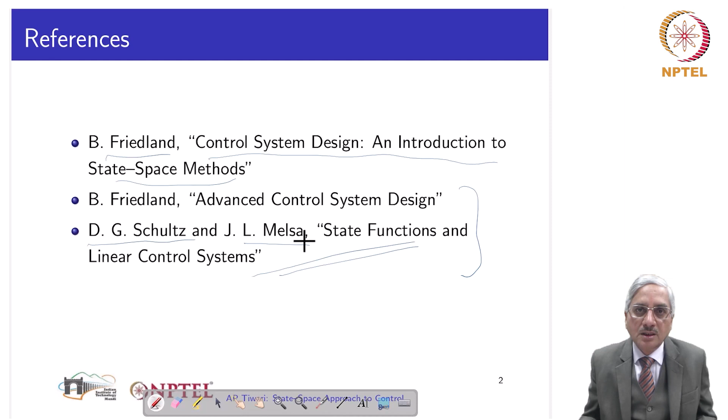I show first the references. Whatever I am going to present today, and in the next lecture, this comes essentially from three references. One is this book by Friedland. I have been following quite very much from this book; many chapters have come from this. I am very fond of this book, very nicely written. Then the remaining two, for continuous time Kalman filter derivations and one example, I have taken from this book by D.G. Schultz and J.L. Melsa. It's also a very nice book in control systems, which I find very entertaining to read, very nicely explained things. Let us proceed ahead.

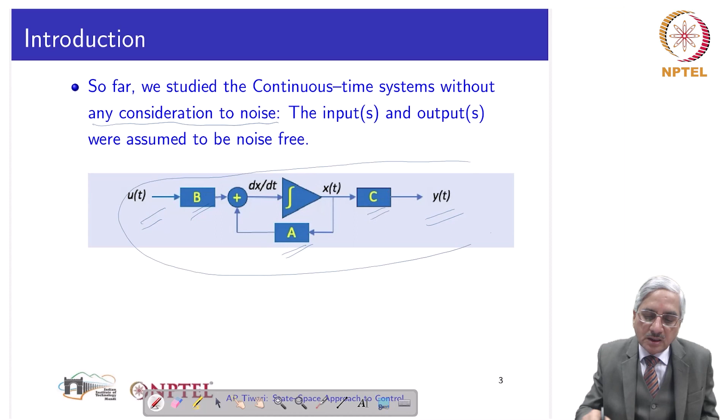As I said in the beginning, we studied continuous time systems so far without any consideration to noise. The inputs coming to the system and the outputs coming out of the system were both assumed to be noise free. No consideration was given, and even though the matrices A, B, C in the state space model utilize this form, nowhere do we see any noise.

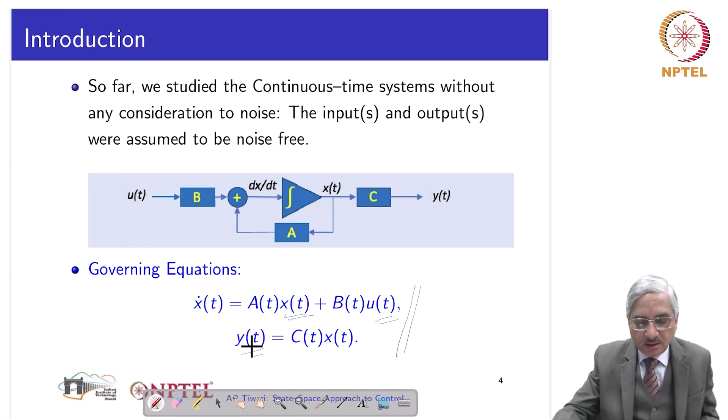And with that, these were the equations we used. So everything is quite deterministic in nature. This system state, system input and system output have been studied in a pure noise-free environment.

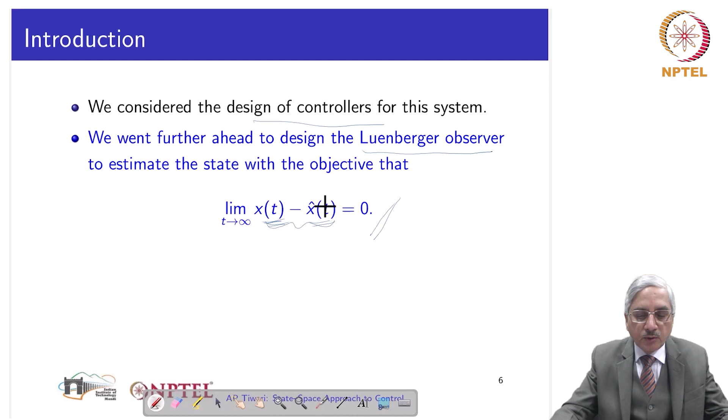We designed controllers, and then in the design of a state feedback controller, we realized that to implement it we require states, and not all the states are accessible or measured, for reasons of economy, installation, etc. So a respite came that the Luenberger observer is capable of estimating the states, with the objective that when time t tends to infinity, the deviation of the estimated state from the actual state, or this error, will be small. With this objective, we learned the Luenberger observer.

And we went on. We studied the separation principle, which established that when we use the estimated states from the Luenberger observer in place of the actual system states, we get the stability and performance as we would have got with actual states, except for some initial time during which the states of the observer converge to the system states. After that, the performance of the system is as good as the performance that would result with the feedback of actual states of the system.

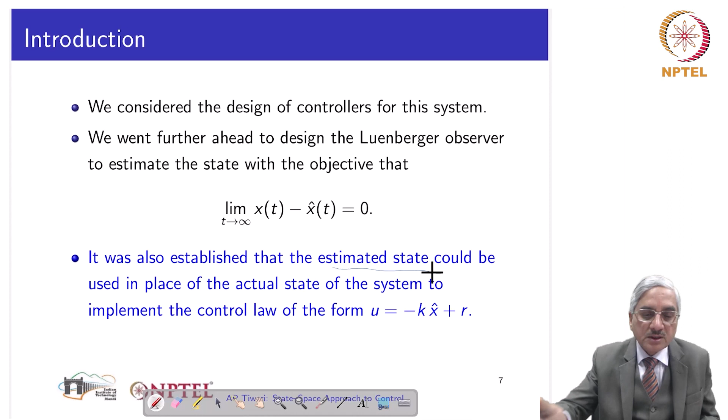Then we also established that the design of the control and the design of the observer could be carried out independent of each other, and the overall system, with the state feedback controller designed separately and the observer designed separately, when brought together in realization, will be stable. This is what we established, and we utilize that even for the Kalman filter. Now we are at the point where we actually consider the noise associated with measurements.

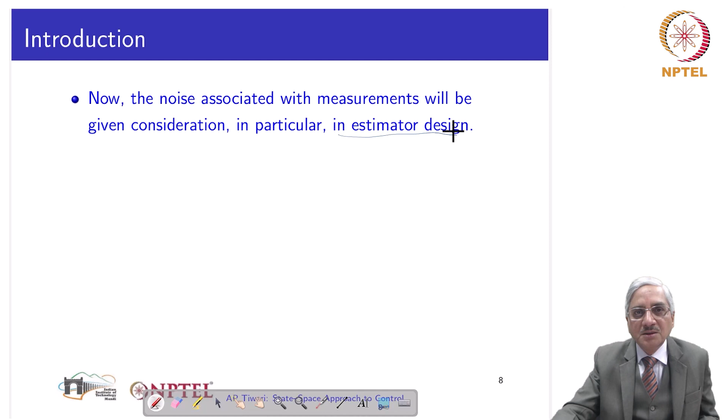Here in the estimator design, not in modeling, we are not going back, only in the estimator design. So basically, the design of a state estimator, which we will be learning now, depends upon probabilistic data concerning the noise. Probabilistic data will consist of the average and the covariance, etc.

And we will design an optimal estimator which will generate the estimate of states which is best possible with the given noise statistics. That is the beauty. And this is the meaning of the best estimate - that the output of the estimator will be closest to the ideal value despite the presence of the noise, despite the noise corrupting the system characteristics.

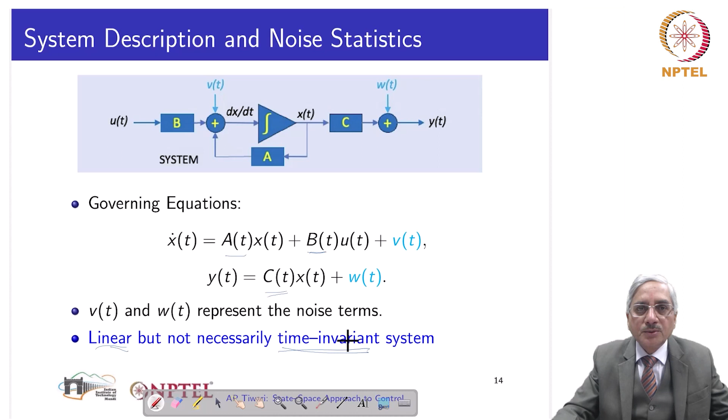Now, first we see whether you call it properties or you call it assumptions. So the noise which we can handle through Kalman filtering should have these properties. First thing is that it should be additive. As I told earlier, both add one to the input and one to the output. So both are additive in nature, and there are only two forms of noise considered, the Vt and the Wt, the input noise and the output noise.

And the additional property they should have is both of them are white noise. Now, one should study literature to understand what is white noise, but this is a short explanation. The value of the noise at one time instant is not at all related to the value of noise at some other time instant. In that sense, it is called white. It generally contains, if we see over a long time, almost all frequency components.

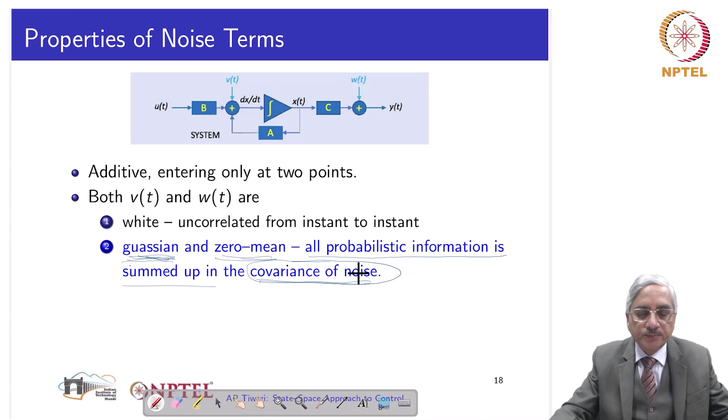The other assumption about both the noise terms Vt and Wt is that both of them are Gaussian and zero mean. Now what it means is that, especially because of Gaussian, all probabilistic information is summed up only in the covariance of the noise. We need not go for higher moments. The covariance, the second order moment, is good enough to characterize the noise. So Vt and Wt, with this assumption that they are Gaussian and zero mean - zero mean means average will be zero, average taken over some time, and Gaussian means that the characteristic of the noise is fully represented by its covariance. This is the meaning of this. And mathematically it is like this, that expectation of this Vt into Vt transpose is a Q matrix.

This V is a vector, mind it, because it is entering at input terminals. It has the same dimension as B times U, where U has M inputs. This B is multiplying U, and to that Vt is adding, so it has the same dimension as Bu. Bu is a column vector, so Vt is also a column vector of the same dimension as Bu, which is the same dimension as Ax, which is the same dimension as x dot, or n. So Vt has dimension n.

And so Vt transpose will be a matrix, and its expectation, that covariance, is a matrix Q, and we assume that it is positive semi-definite.

The output noise Wt again has the same size as Cx. It is a vector of dimension p, if the output is p dimensional. So it is a matrix R, and about this our assumption is, we'll see subsequently in derivations it will be visible that R inverse is to be evaluated, so R must be positive definite.

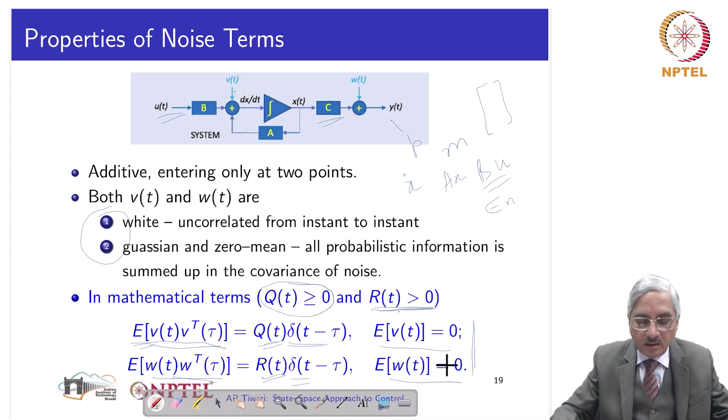So these are the mathematical characterizations of these properties of Vt and Wt. Covariance is Q. They are uncorrelated from time to time, so that is why this delta. They are zero mean, so that is this. Now they are uncorrelated to each other, so this will be zero for all time, t and tau, for any time.

And the initial state of the system is assumed to be having a mean m and covariance p0.

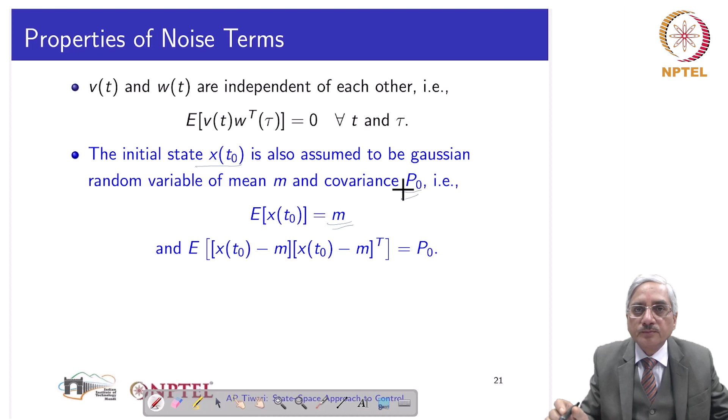So let us interpret this a bit. So xt0, let us first consider a single state variable. A single state variable with time will have some, let us say, this kind of variation. And then we are considering at t0. So at t0, when we do in the deterministic sense, there is no noise, nothing, then we know the state is here. This is the xt0. We are considering one of the states, let us say xi.

Now when we say that it is containing noise and its expectation is m, so of course this is m, but then what it means is it could be a little more or a little less, and this band is something which is very random. However, the mean is here, and around that, its covariance, which is covariance is p0.

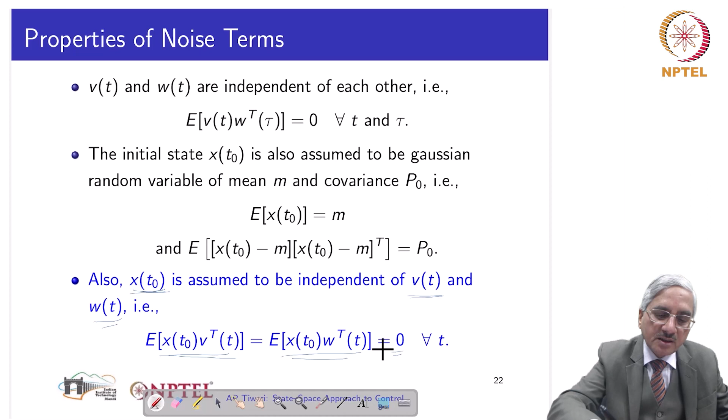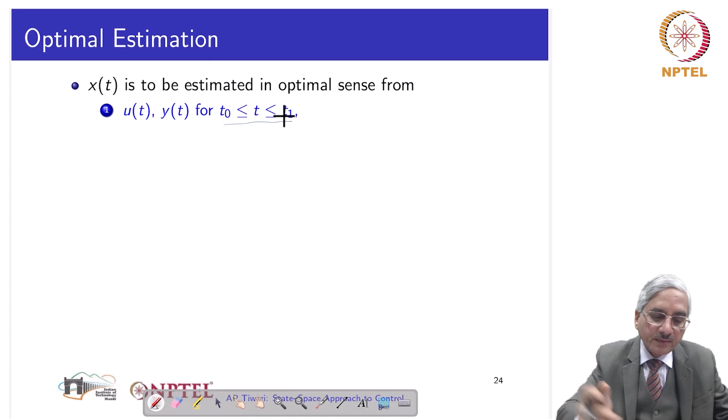Now with that we state the estimation problem, the optimal estimation problem. So we are given ut and yt from t0 to t1, at all instants of time between t0 and t1. Ut and yt are continuously given, and we are also given the probabilistic description of xt0, vt and wt, meaning mean and covariance, that Q and R and P matrices, P, Q and R matrices, this is given, and the means are assumed to be 0, or if they are non-zero they are given. So we have the knowledge of input and output in this time interval, and we have the statistical information, probabilistic description of the initial state, the input noise and the output noise.

And now we first consider the case of an autonomous system, so we are assuming u equal to 0 all the time during this interval. We assume ut to be 0, and we are also assuming that instead of estimating the entire set of state variables x1, x2, etc., we are considering a linear combination of states, a weighted sum of states. So just one quantity we are considering to estimate, which is bxt. b is a vector. We are not first considering the entire state vector xt, we are considering a weighted sum.

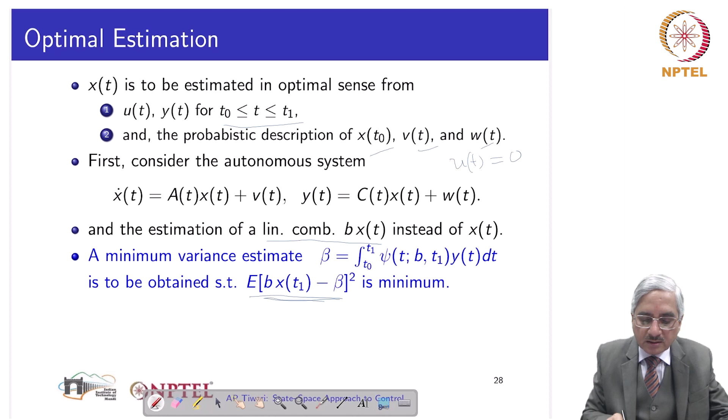And you can see we are assuming that this beta, which is the estimate of bx1 in the optimal sense, is given like this. Now this requires a deep understanding of statistics.

We are taking it as granted that we want to estimate beta, which is a function psi of t given b and given t1, and this beta will be this integral, a function of psi multiplying with y integrated with respect to time over the interval t0 to t1, we will get a beta which is the best estimate, minimum variance estimate of

this linear combination. So this is the starting point, and as I said, this we are taking for granted that it will come in this form. And as we will see, with this we get the solution, we get the result. So it is a good starting point.

In other words, we have to minimize the square of this deviation of bx1 from this integral. This expectation has to be minimized. And it has to be done for any arbitrary b and any t1.

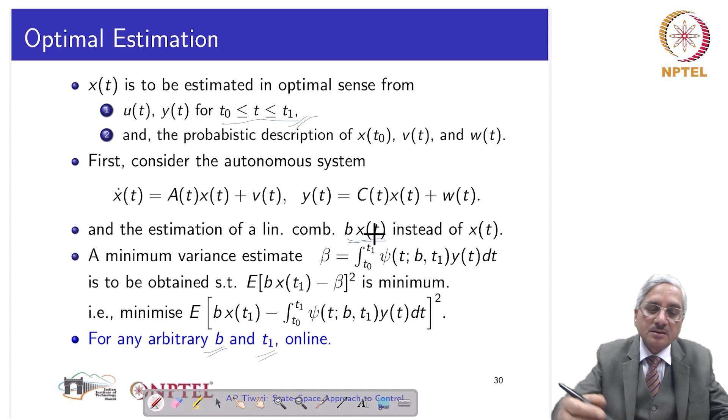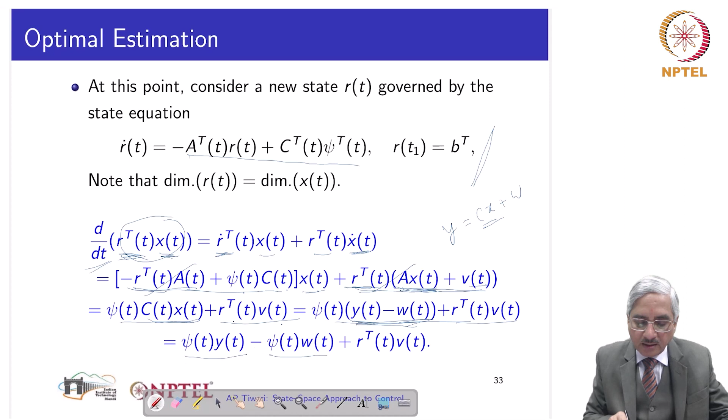and ct xt we realize is yt minus wt, because that y is cx plus w. So cx is y minus w, we do that substitution, and rt vt as it is. And now we open this, so we get psi t yt minus psi t wt plus r transpose v. This is what we get rewritten here.

Now we proceed further. We integrate both the sides, all the terms on both sides, between these lower and upper limits t0 to t1, and we have the boundary condition r(t1) equal to b transpose. So here, this is the integration of the left hand side, which is the integration of d/dt of r transpose x, and this becomes...

Integration of a derivative is the integrand evaluated at the upper limit of the integral minus the integrand evaluated at the lower limit. So we have r(t) x(t) evaluated at t1, and r(t0) x(t0) r transpose evaluated at t0, so this becomes equal to b x(t1), and this remains as it is.

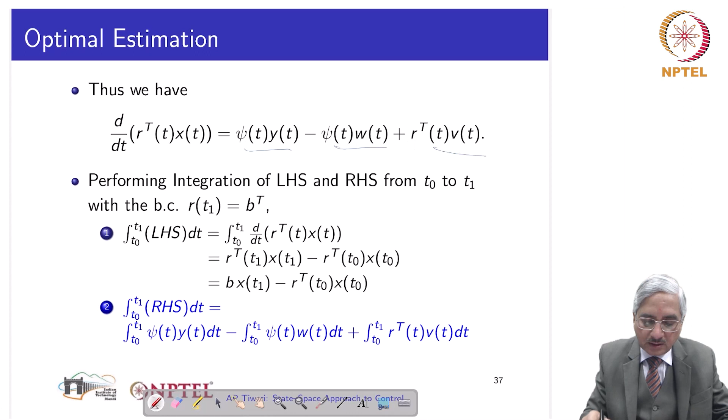So we get that, and the RHS is the integral of this, integral of this, integral of this, which is written here, and of course we will consider them. Both have to be equated. So this is the integral of the LHS, this is the integral of the RHS, and they are equated to each other.

Now what we do is we take this psi and y term to the left, and this one we take to the right, and we rearrange. We have seen this before. Our intention was to get something about that only. So we have taken this to the left, we have this difference, and the remaining three terms are here.

Now we square them and take the expectation. Here there is something we have to accept, and the explanation must be referred to advanced mathematics and statistics. We square the left hand side and want to take its expectation. What we do is say that the expectation of this whole squared term will be equal to the sum of the expectations of the individual terms squared. This is something to be supplemented by further reading, but we take it that expectation of the left hand side squared equals expectation of this squared, which equals the sum of expectations of the individual terms squared.

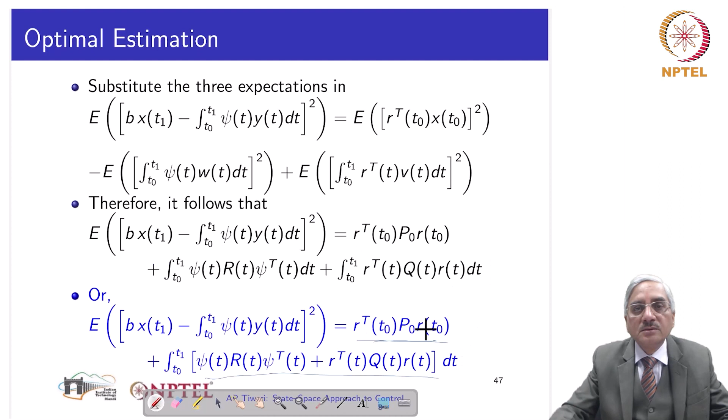This has a lot of resemblance with something seen earlier, which will be shown in the next slide, but let us recap what we have done so far.

We have seen many complex mathematical equations, some easy to follow and some taken for granted. We have the system description with additive noise, with known covariances Q, R, and P0. We assumed a state equation like this and a boundary condition like this. We posed the estimation problem as estimating a linear combination of the states at time t1, and we intend finally to say that for any b and any t1 it should work, and it should work from any t0 to any t1.

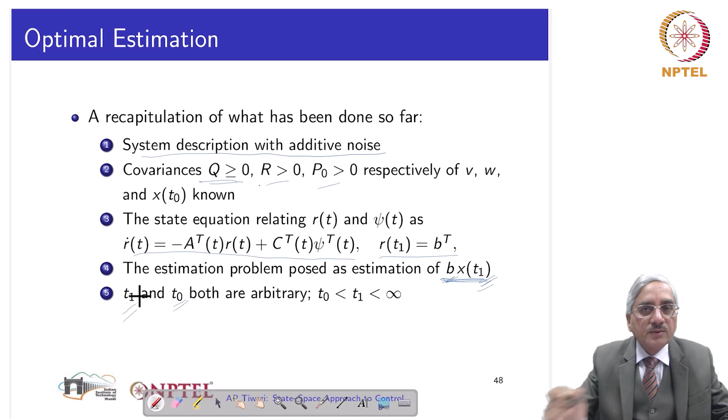So now with that recapitulation, we come back to restate the problem: we have to minimize this, which is derived to be like this, and the psi is coming here, C transpose psi, exciting this system, which we had assumed. So now this whole thing seen together appears like a regulator problem which we had seen a few weeks earlier.

With two differences. One difference is that generally this is given in the regulator problem at terminal time; here it is given at initial time. The other difference is that RT, generally the state equation is given with an initial condition, but here it is given as a terminal time, final time t1, with a boundary condition. So otherwise it is like a regulator problem.

So now we leave a lot of gaps and straight away say that on similar lines as in the case of the regulator problem, it will have a similar solution. So psi transpose will be expressed like this: R inverse C into P. In the regulator problem, it was R inverse B transpose P. Here, because it is the output matrix we are considering, it is R inverse CP. And this P comes from the solution of this Riccati equation with this initial condition, and we want the positive definite solution.

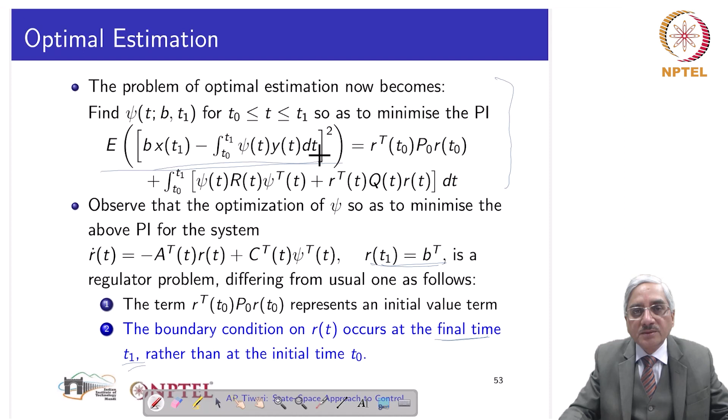So the solution to this problem - let me go back to the previous slide. The solution to the problem of optimal estimation, to minimize this performance objective for this system, is this, where this P is the positive definite solution of this Riccati equation with this initial condition, P of t0 equal to P0.

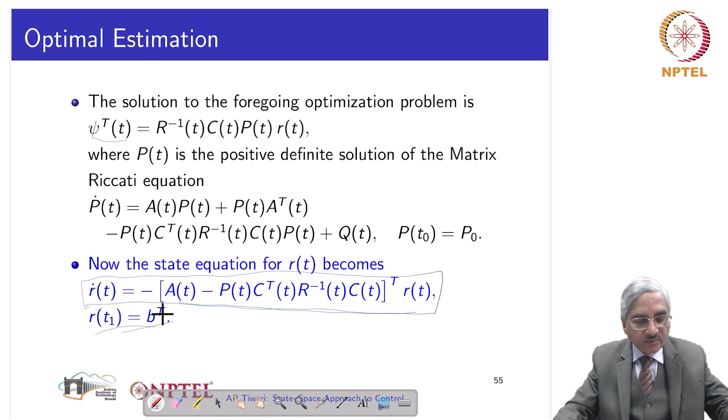Once we have the solution of this Riccati equation, we know P, then we can substitute psi in that equation for R, and so we have R given by this dynamic equation with this boundary condition rather than the initial condition. We get R given by this, and we can rewrite it by introducing a matrix AE as A minus this - this is that psi transpose.

So we introduce AE, and its state transition matrix we denote by phi E. Then RT will be given by this. This B is the final condition - RT1 was B. So RT is given by this state transition matrix, pre-multiplying that final condition, and psi is given by this. We have substituted R.

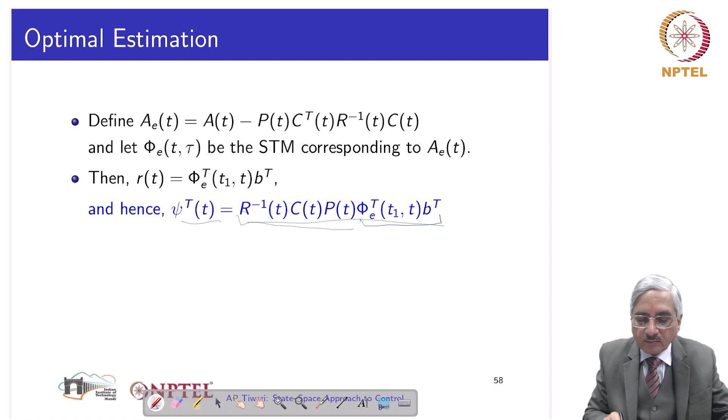Here it was psi - one more. Psi was this, and we substitute R there. So we get this - this is R and this is psi. So we get this for psi, and once psi is known, then we know beta, which can be determined.

So thus we have arrived at a meaningful result, and from that now we want to see how we can estimate all the components of the state vector. So far we concentrated upon Bx at t equal to t1. Now we see how we can estimate all the components of x at t1, or probably at every time t.

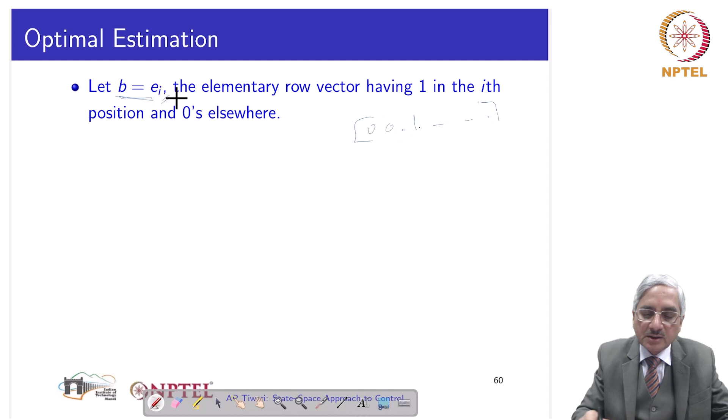So we assume that B is EI. EI is the elementary row vector, so it has all zeros, somewhere it has 1 - at the ith location it is 1, remaining all locations it is 0. This is EI. So in that case, Bx at t1 will be Xi at t1, because we have, let's say, 3-dimensional 0,0,1 into x1, x2, x3 will give x3. Similarly, in a 4-dimensional 0,1,0,0 into x1, x2, x3, x4, this gives x2. So Bx at t1 with B as EI is Xi, the ith state.

And that means Xi at t1 will become this. And substituting for psi, we get this. Now if we do this for different EIs - E1, E2, etc. - and take them together, then we will get the entire X. And that entire X, the estimate of X, we are denoting by XE. XE is the estimate of X. It will be given by this - we got this result.

Now we have to do something so that it becomes recursive, so it becomes realizable. So what we do is differentiate this expression on both sides, and we get this result, with that definition of K, which is given here. This one we are denoting by K.

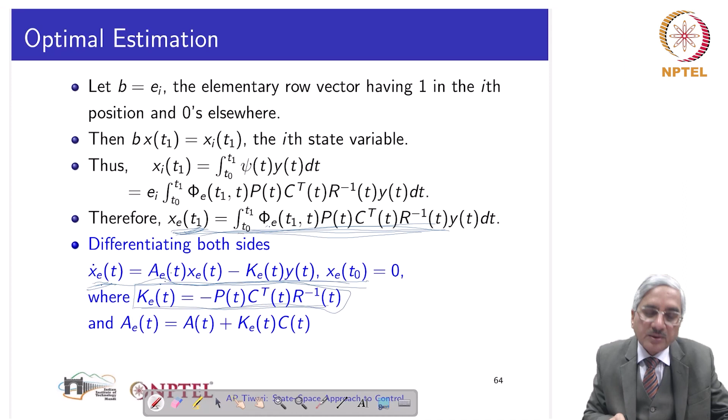And if we differentiate this again, we have to know a few properties of integral calculus - how by differentiating this we will of course get XE dot, the differentiation of this, but how from this we get this, where AE and phi E - phi E is the STM corresponding to AE, which we have seen. So from this, by differentiation, we will arrive at this. And of course the Kalman gain KE is given by this expression, and AE is the closed loop system matrix with KE and C.

So we got basically a closed loop equation given by this one, and the Kalman gain given by this one, where P is obtained by solving a matrix Riccati equation, as shown in the previous slides, with known initial condition. That means we can estimate XE by this.

Let us see its resemblance. It is very similar to the observer equation in case of a Luenberger observer. Estimated state is governed by AX plus this. This is a prediction. Of course, we did not yet consider that BU term.

So if we know XE at some time t, we can find out at subsequent times, and the differential equation is x dot equal to AX. We have assumed 0, so x dot equal to AX will give prediction of the state. However, that is only a prediction. It can be corrected with this.

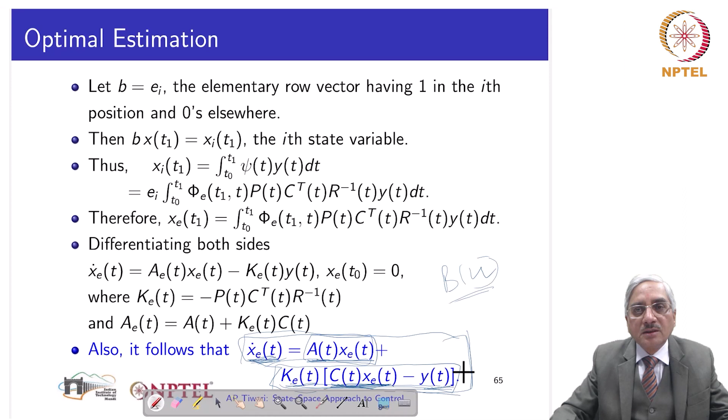And then the state of the estimator is given, estimated state is given here. XE equal to AXE plus KE into CXE minus Y. This is the summary of optimal estimation in case of an unforced system.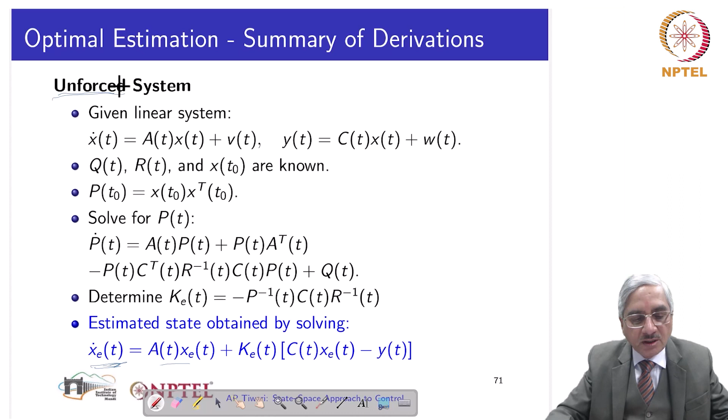We had assumed ut not equal to 0, that means the forced system. If we do similar derivations, almost everything remains the same. Only two equations change. One is this equation, the state equation characterizing the system, so we get this term back.

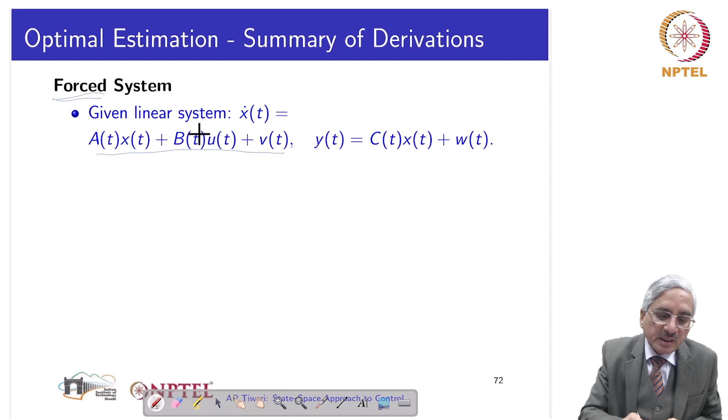This is given as it is. This Riccati equation is as it is, which was there in case of the unforced system. This Kalman gain computation is as it is, which was there in the unforced system. Only in case of estimated state, we get back again this B into U term. Rest all the derivations will remain identical.

And once we have done the forced system and the unforced system, we are ready to write the forced system with only these two small differences. Rest all the things are identical. This matrix Riccati equation is identical, and this solution of gain is identical. This is all about Kalman filter equations.

So once again, this is the given system, this is the noise, this is the output equation, this is the noise. We know Q and R characterizing the two noise terms, their covariances. We know xt0 with some uncertainty or error, so we have pt0. We solve this Riccati equation given this initial condition, and we accept the positive definite solution.

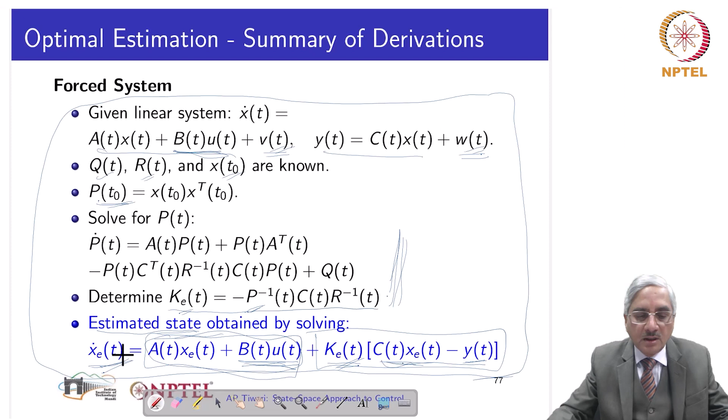Now let us proceed to see how it is realized, how it is implemented. So this is the system, X dot equal to AX plus BU, and in that noise was coming. So this system is giving the output. This is the physical system, and of course that is characterized by matrices A, B and C.

They may be time varying, so we have the knowledge of those matrices A, B and C. We solve the response of the system with respect to X dot equal to AX plus BU using this state equation. Now, having predicted X, we calculate CX, which is here. We compare it with Y and get the error.

That error we multiply with KE and we get the correction. So this plus correction, and this is how it can work continuously online, and it can go on giving the estimate XE. So XE is the estimate of X, and it can be used for various purposes: for implementing a state feedback, for fault analysis, etc. It has various applications.

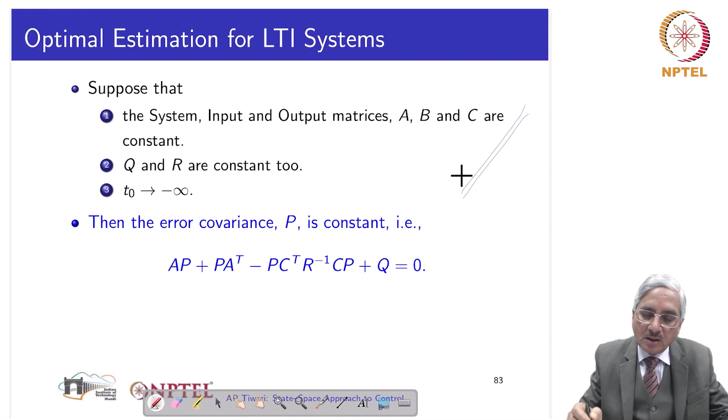So in that case, with A, B, C constant, and T0 and infinite time in the past, that matrix Riccati equation reduces to the algebraic Riccati equation, which has a unique solution for P. So we get P, and we have K relating to P.

So the Kalman gain can be calculated, which is also constant. So K will also be constant. This calculation has to be done only once, and the Kalman filter can be implemented just with fixed K, and it will do the estimation even in the presence of noise.

Now we consider one example, a second order system given by this state equation. A matrix is this, B matrix is this, and we are measuring the second state. This is the C matrix.

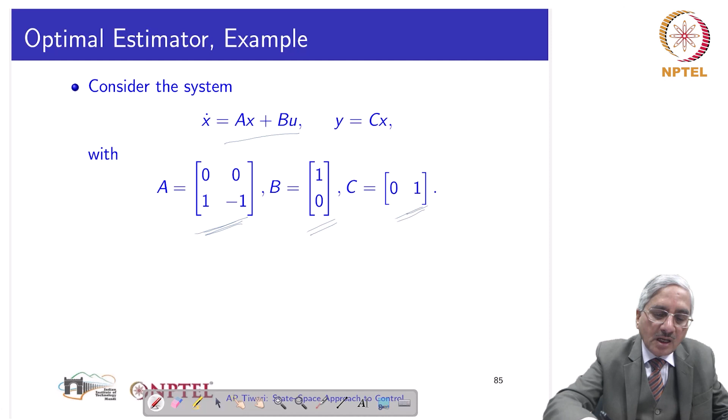And we have the knowledge of the noise Vt and Wt. So Vt is the additive white noise at the input, with covariance Q. And Wt is a white noise with covariance R adding at the output. So Q and R are covariances characterizing the noise terms at the input and output respectively.

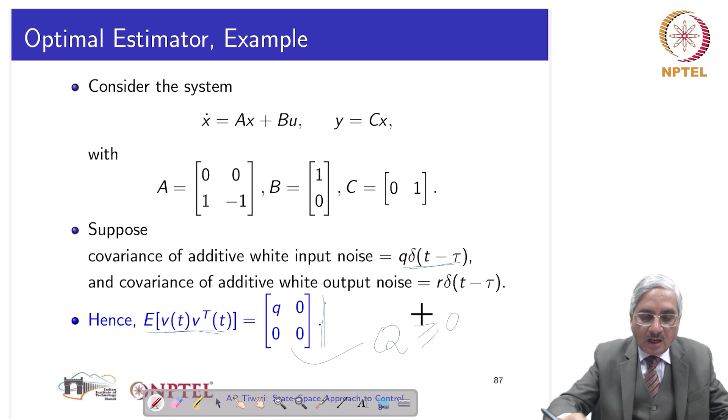With this, we see that E of Vt, V transpose will be this 2 by 2 matrix, and of course this is that Q matrix in our derivations, and we see that this is positive semi-definite. And R we are assuming not equal to 0 here, so it is positive definite.

So when we do that, AP plus PA transpose minus... let me go back, I also do not remember, but I have it written on this piece of paper. AP plus PA transpose minus PC transpose R inverse CP plus Q is the steady state form of the Riccati equation, or algebraic Riccati equation.

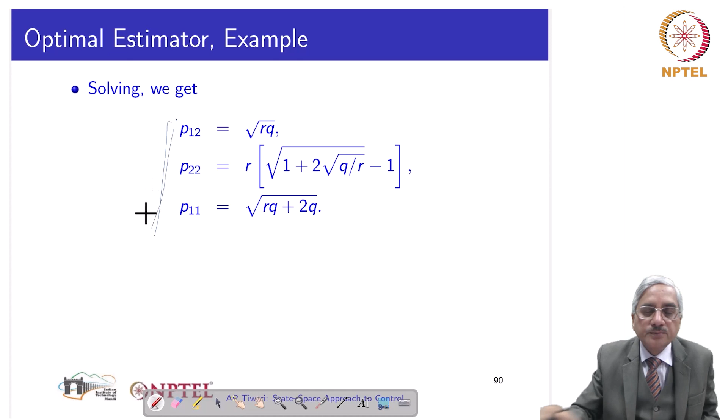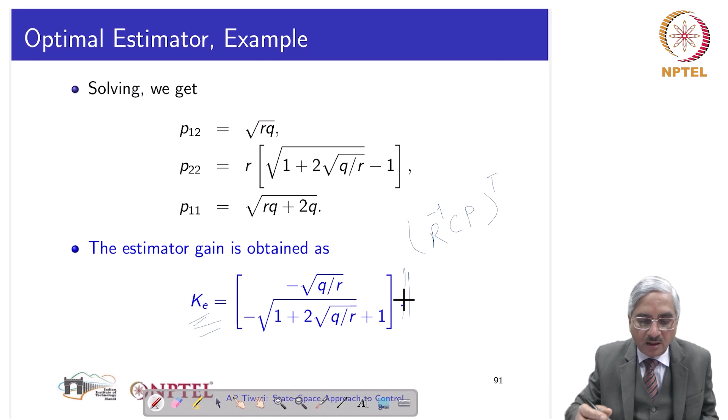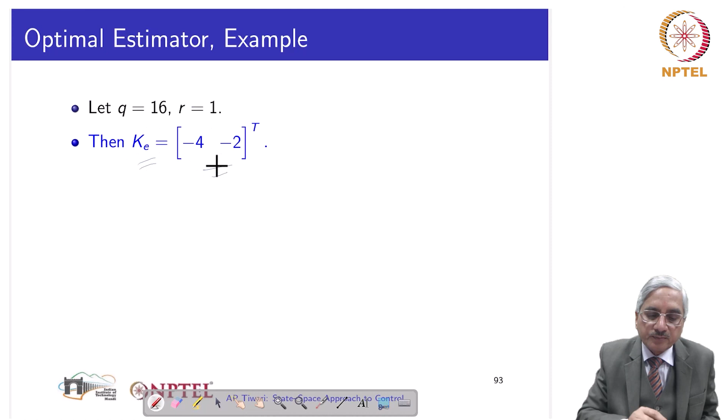We can evaluate this for, let us say, Q equal to 16 and R equal to 1, and then the Kalman gain K becomes this. With that, the closed loop system matrix, A minus KC transpose, C transpose K, will become this, and we can check it is stable.

And because this was a linear time invariant system, with noise statistics Q and R constant, because of all this we required estimating Ke only once, and that will be applicable throughout for any T. So this K has been estimated optimally.

That is the difference from the Luenberger observer. In that, the K was designed so as to stabilize the observer. Here this K is designed to minimize the error, the state estimation error squared. And it will also lead to a stable system. That is proved in literature.

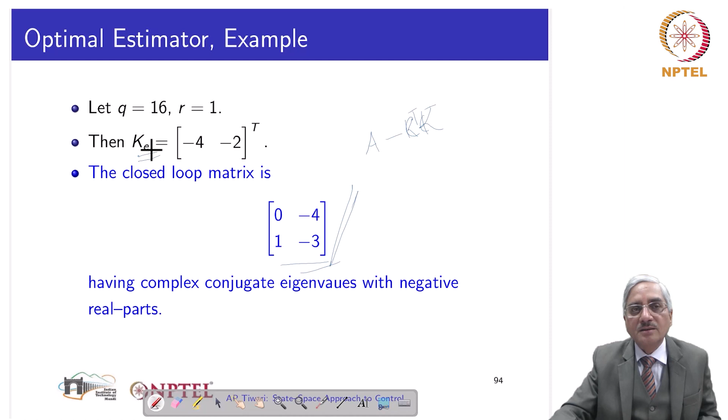So with that, we come to the end of this lecture. There is no specific summary given here. Only thing I want to tell here is that despite the derivations being very complicated, despite many things not understood, what remains the reality is that the Kalman filter is something which applies in so many areas.

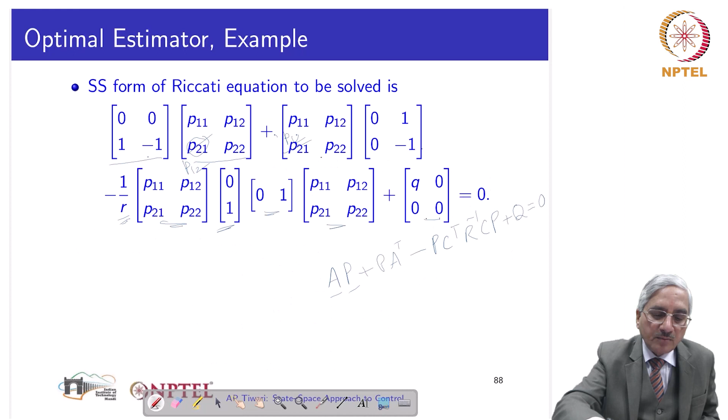It has tremendous applications, numerous applications, and it gives the estimate of state in noisy situations, and sometimes even with some uncertainty in matrices A, B and C. It generates the best possible estimate. That is the reason it has so much popularity, so much utility, and so many applications in various scenarios: in nuclear industry, in chemical industry, in aviation, in defense applications. Everywhere one will find a Kalman filter.